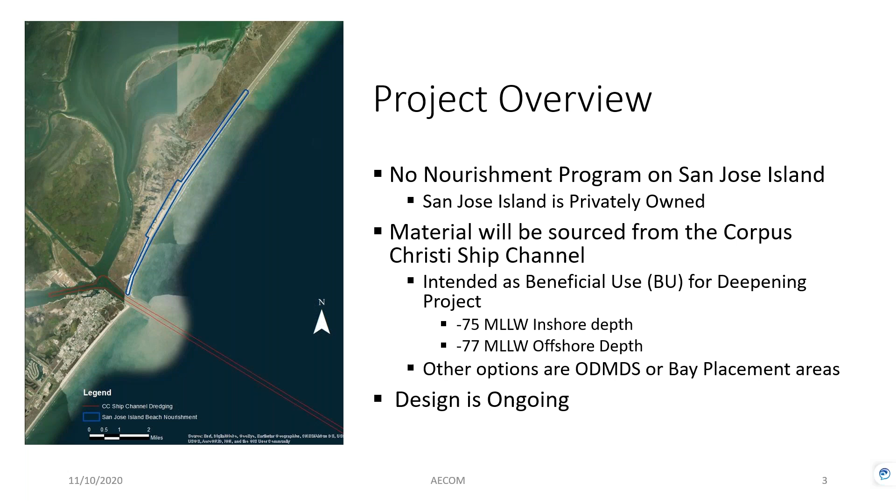And as you can see on the picture on the left, the extent of where the intended nourishment is.

Now a brief history of the site. As you can see on the leftmost picture, taken in April 2017, pre-Hurricane Harvey, there are no major washouts on the beach, and it's pretty consistent beach all the way along the site. Then a picture was taken immediately post-Harvey.

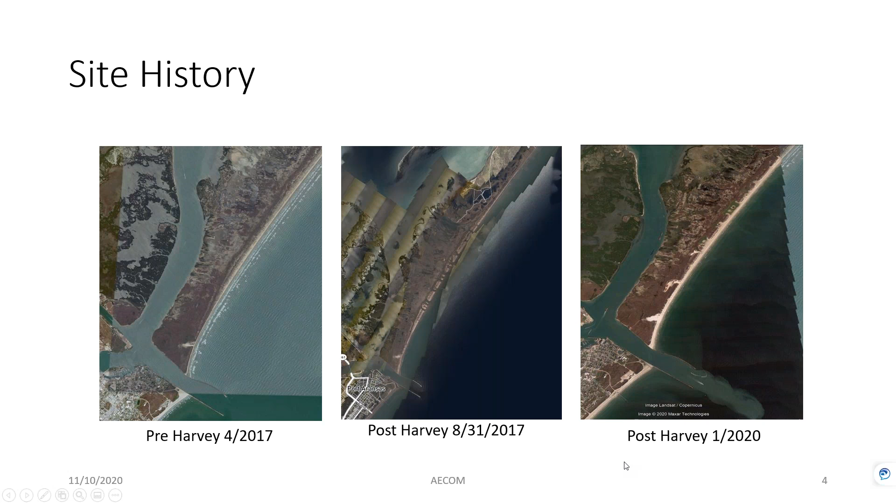From this picture, there is major washout and breaches throughout a large portion of what is shown. Then, post-Harvey, a more recent photo shows some natural recovery, but there is still major washout that needs to be repaired due to the damage by Harvey.

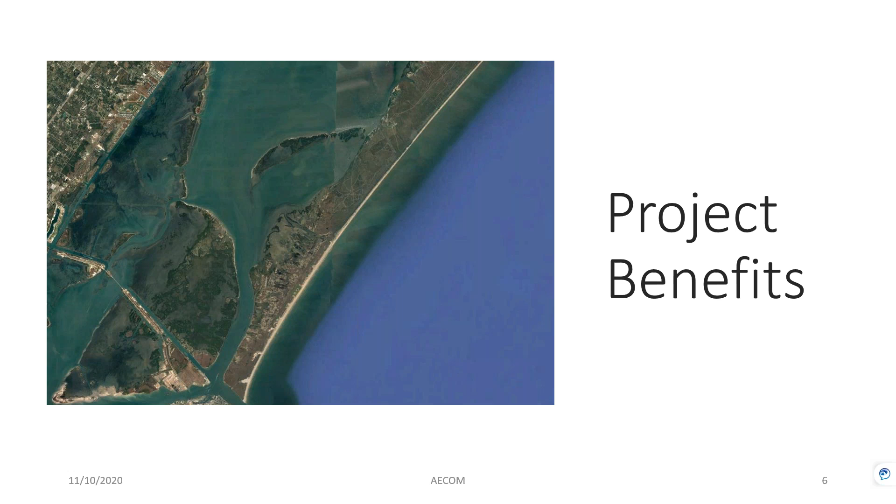Additionally, there are some other benefits. San Jose Island, while undeveloped, provides protection for the critical habitat located directly behind the beach, as well as providing the first line of protection for some submerged aquatic vegetation and other critical habitat in Redfish Bay behind the island. So that island will give some more protection there.

Now we will move on to survey work that has been performed. Starting with the geotechnical survey work, there have been 22 boreholes representing approximately 16.6 million cubic yards of material. For each of these boreholes, we looked at a grain size distribution as well as a soil classification at multiple different depths. This was done to determine whether or not the material was suitable for the beach.

In order for it to be viewed as material that could potentially be placed on the beach, it had to be classified as sand, have a similar grain size distribution to the selected site, and have no contaminants or shell hash. Of that 16.6 million, we found that approximately 5.5 million cubic yards of material met this criteria and could be placed on the beach.

Below, in the table, you see a comparison of the mean grain sizes of the proposed placement material versus the native material on San Jose Island. As you can see, they are slightly larger on average. This is okay because if it's a bit larger, you get more cohesion between the borrowed material and the existing material, which is beneficial to your beach nourishment project.

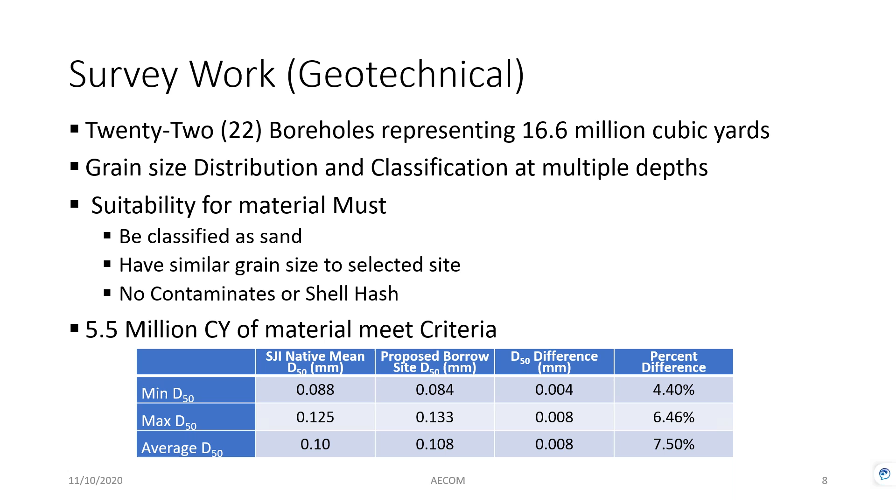Although the mean grain size was not the only thing we looked at when determining whether or not the grain sizes would work, we actually looked at the entire grain size distribution. This slide shows a sample of what was done for each borehole. As you can see, the red line was taken at a depth of 11.5 feet, and that sample was classified as sand and falls relatively well within the existing grain size envelope. So that section of material would qualify as being able to be placed on the beach.

The second line, the green line, while it does line up within the envelope for the existing material, is classified as silty, more like clay, so it does not meet the grain size distribution, and we would not want it on the beach. The farthest one is the yellow line; while it is classified as sand, that sample actually had some shell hash in it, which pushed it outside of the grain size distribution. So that is not something we would be looking to place directly on the beach.

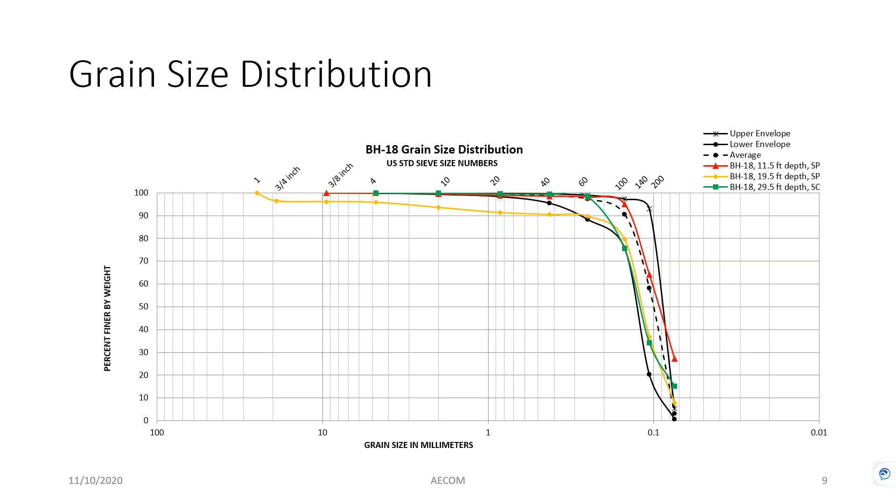And then the bathymetric survey work: there were 6 surveys done by 4 different agencies over the course of 18 years. The most recent was done by Naismith in June of 2019. There were also 2009, 2016, and 2017 surveys done by the U.S. Army Corps of Engineers, as well as a 2006 survey by Aransas County and a 2001 survey by the U.S.

Geological Survey. Surveys were done to determine the design templates along the beach. The entirety of these surveys were just over 18 miles, with about 1 survey every 200 feet or so. We don't have all 6 surveys over that entire distance, but we have at least 1 survey from one of these agencies over that distance.

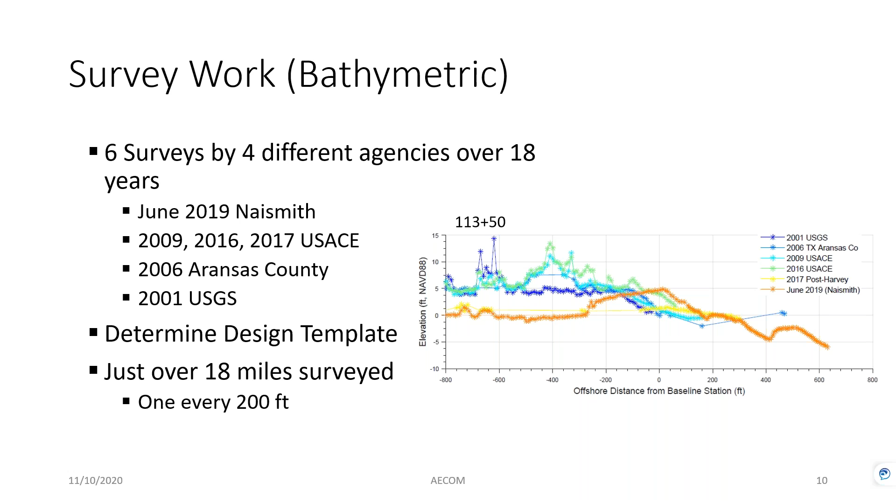As you can see from the survey on the right, the elevation of the beach drops shoreward after Hurricane Harvey, which implies that in this section there was a breach and some major erosion of the dune. That's something we'd look into when determining our design templates.

Now on to the preliminary design. We developed a few typical sections, and in each typical section you will see 2 profiles: a construction profile and a design or equilibrium profile. We have 3 typical sections.

We have one where there is a need for dune restoration, another where the beach was breached and needs to be restored—that breach, restore the dune, and then build out the beach seaward of that dune. And then there are sections with no dune.

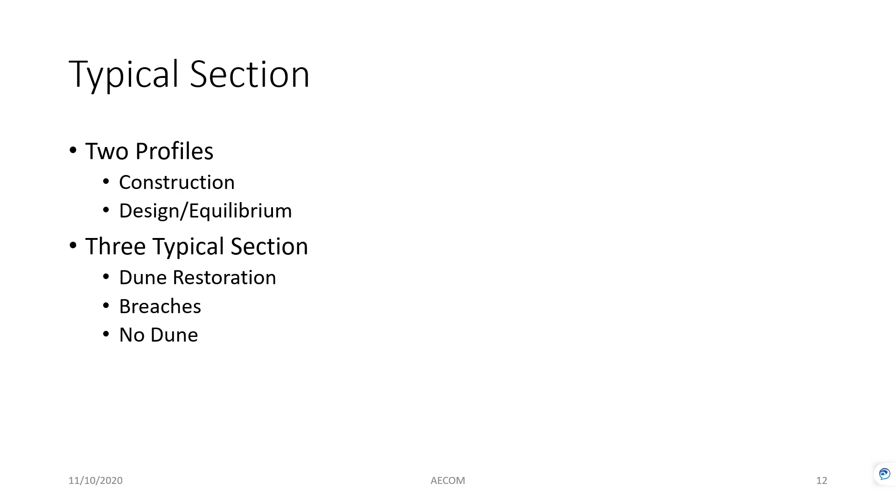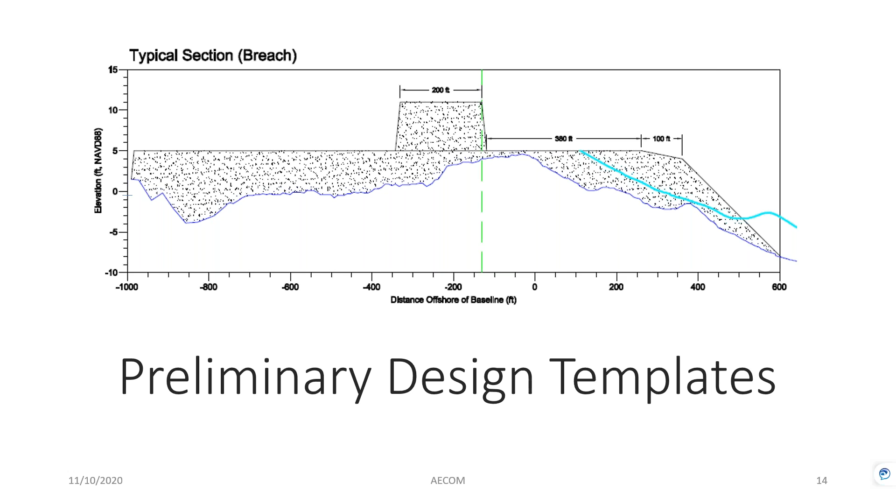Now on this one, there is no dune that needs to be restored. So this is the simplest one, and we are just restoring the beach out. This beach shown here is very similar to the beach sections shown for the previous two profiles.

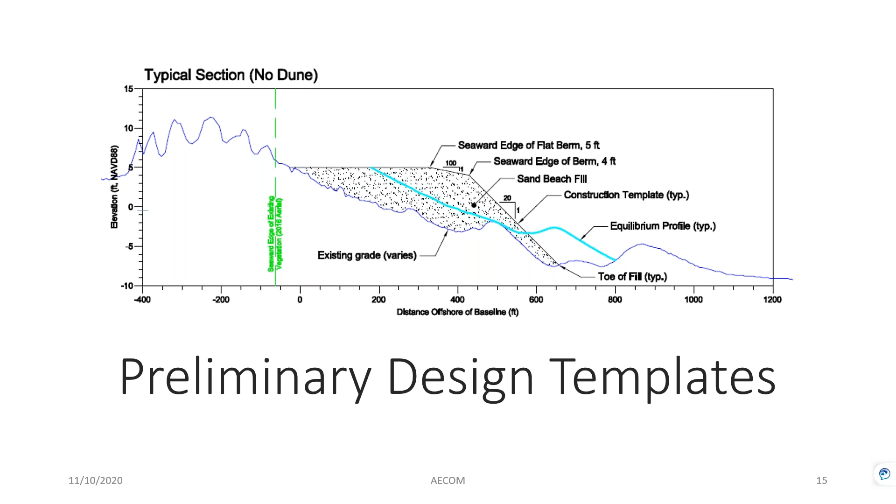Now, as we're going through and constructing these, there are a few things we need to consider that will potentially impact the effects of this project. We need to look at the quality of sand we are placing on the beach—the more similar the existing sand and placement sand are to each other, the better it will be. Also potential disruptions of seasonal recruitment for any benthic populations or microorganisms living in that section of the beach.

The size of the project—looking at how large our project footprint is and how much of the beach we are impacting—as well as our placement techniques, depending on whether we are placing it from the land side or the sea side, and placing it over water versus placing it over land.

We expect to take about 12 to 18 months for the system to reach that equilibrium profile that was shown.

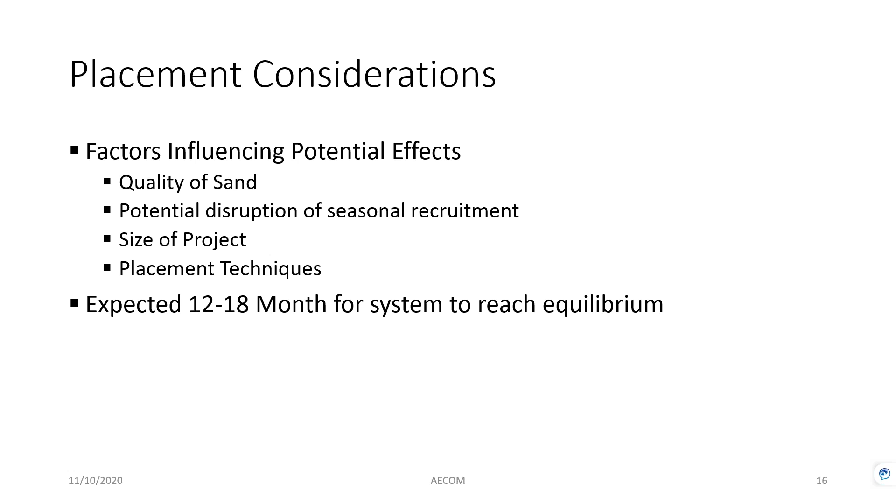The next steps involve an ongoing permitting effort, coordinating with stakeholders including the landowner to get permission to place material there, some wetland delineations that need to be done, as well as finalizing the design of the project.

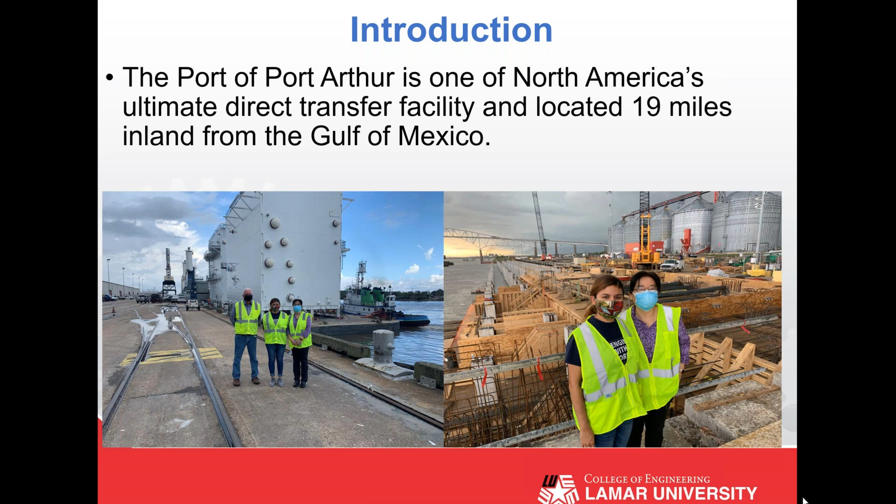Next picture, please, Jennifer. This is in the middle of their dock. You can see on the right side here, the bank on the eastern side has some erosion, with small trees or bushes covering it. They have slow erosion on this side caused by the wake wash. So they need dredging every 6 months. Go ahead, Jennifer.

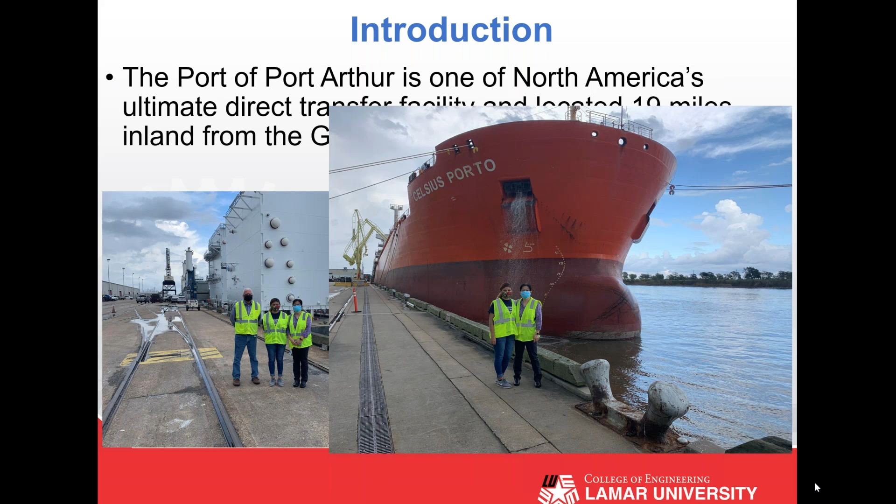We look at the problem around the site. We think the sediment load is caused either from the bank erosion due to the wake wash, or possibly from the channel due to flow condition change. So the objective for this study: we wanted to investigate the sediment load and better understand the sediment transport mechanics. So we start with the analysis using GIS data for the cross-section change.

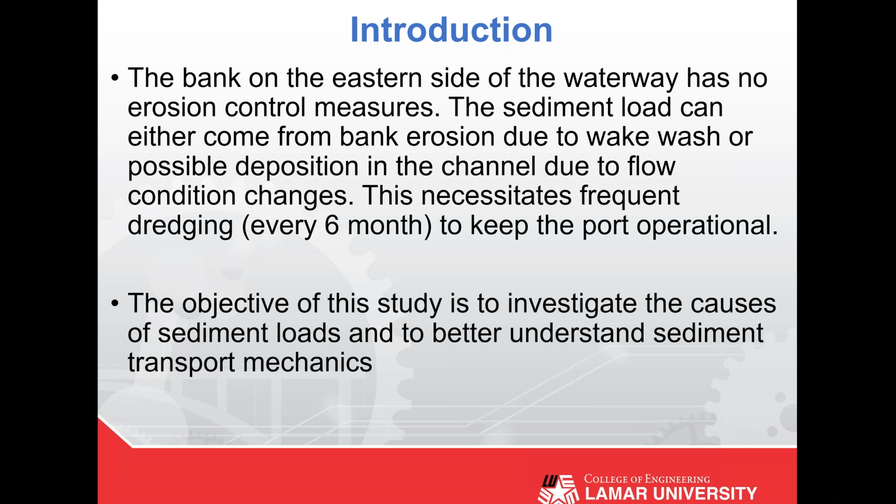Go to the next page, please, Jennifer. So we calculate the cross-section area at different times, using GIS data to try to calculate the flow area reduction over time. Then we also look at the flow data to try to figure out the flow condition in the waterway, at the station but also from the NOAA website. Then we combine the volume change and area reduction change with this flow condition to see what the main cause is in the flow condition for the sediment load in this part of the waterway.

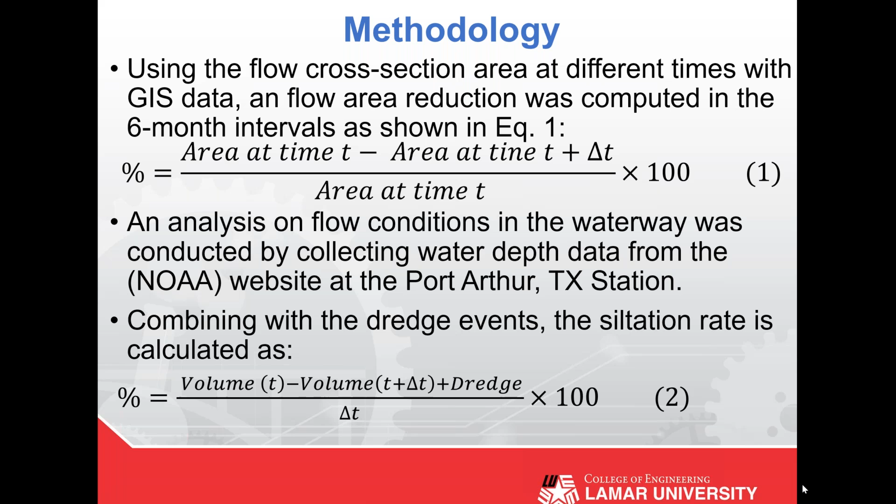We also combine their dredging events, trying to calculate the siltation rates along with time, to see what is the main effect on the sediment transport in this part of the waterway. Now I'm going to turn it over to Jennifer for the results.

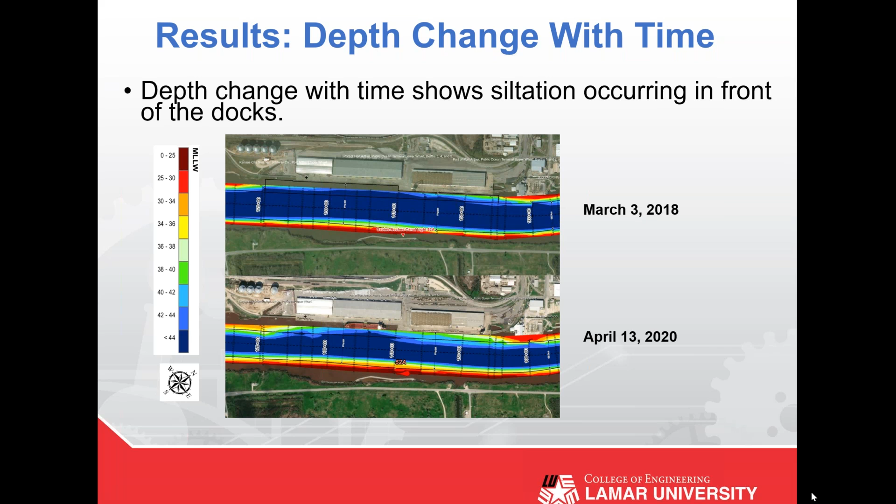To see the elevation change over the years, we used ArcGIS to convert the contour line shape files into raster files. There are 4 stations in front of the docks. However, we selected these 2 locations, Station 150 and Station 130, since they showed the most dynamic cross-sectional change over time. An animation will be demonstrated for these locations.

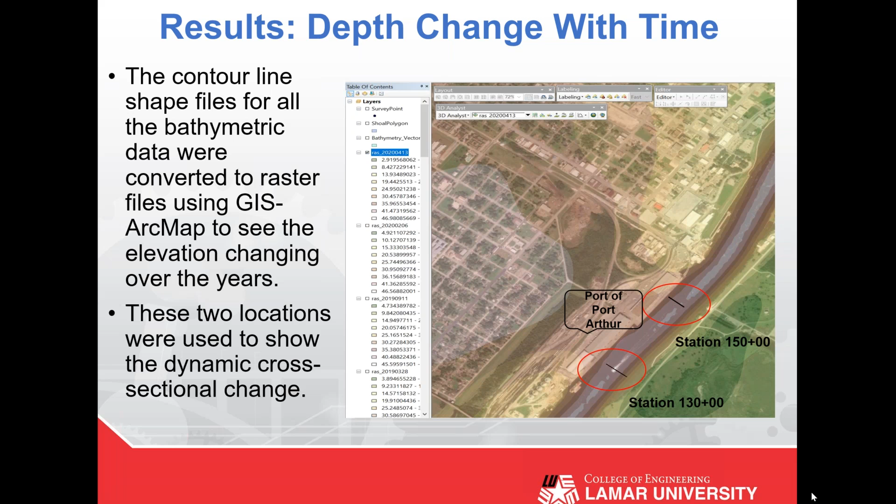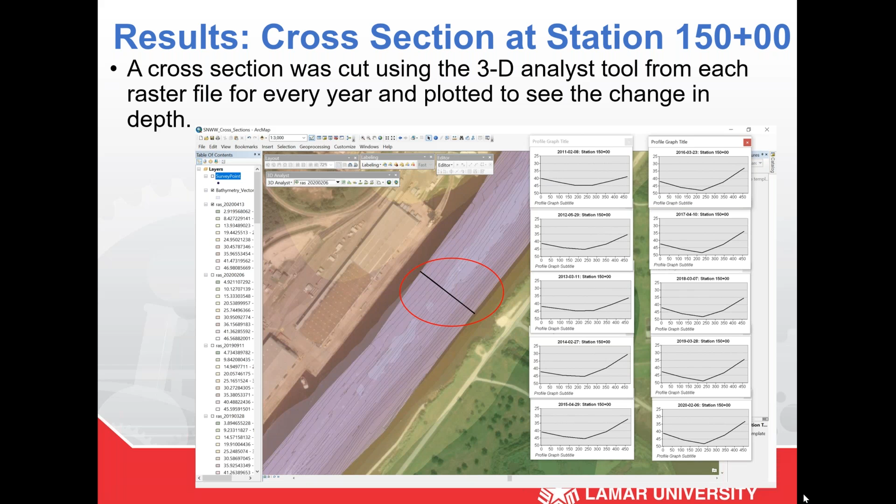Using the raster files, we were able to cut our own cross-section using the 3D Analyst tool. One was cut for each 6-month time period and graphed. Below are the cross-sections for Station 150. Here is an animation of the cross-sections at Station 150 showing how they are changing over time.

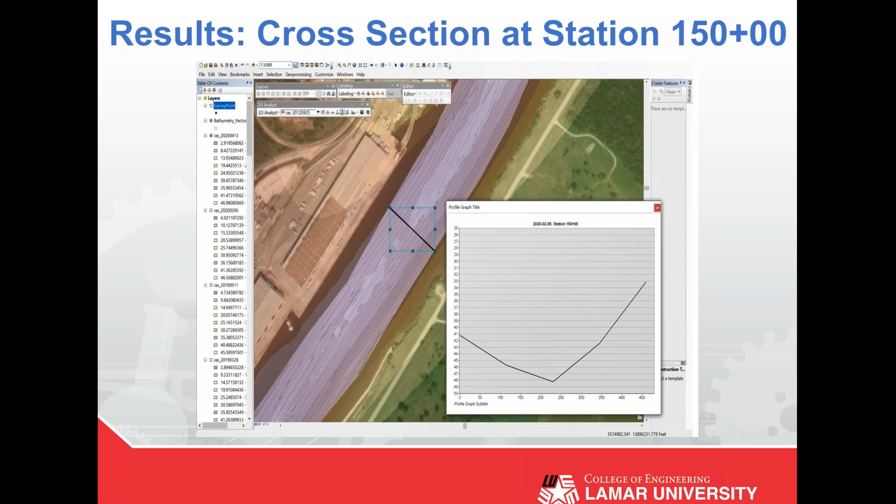And here are the cross-sections for Station 130, along with the animation.

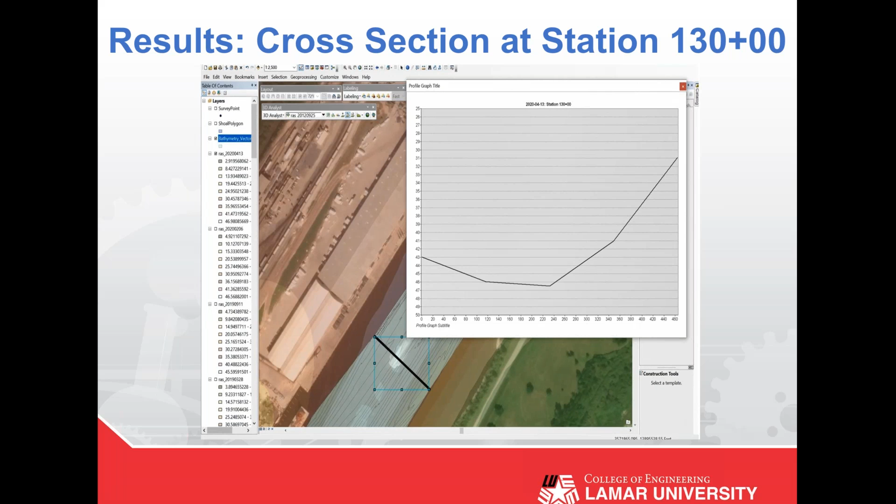Once a cross-section was cut at all the stations in front of the docks, the data was collected and inputted into an Excel spreadsheet. We were able to calculate the area at each station and calculate a percent reduction. Each data is listed for the recorded dates along with a graph of the cross-section. The percent reduction shows how much siltation or dredging occurred between the time intervals, so you can see how the area is increasing or decreasing on the graphs.

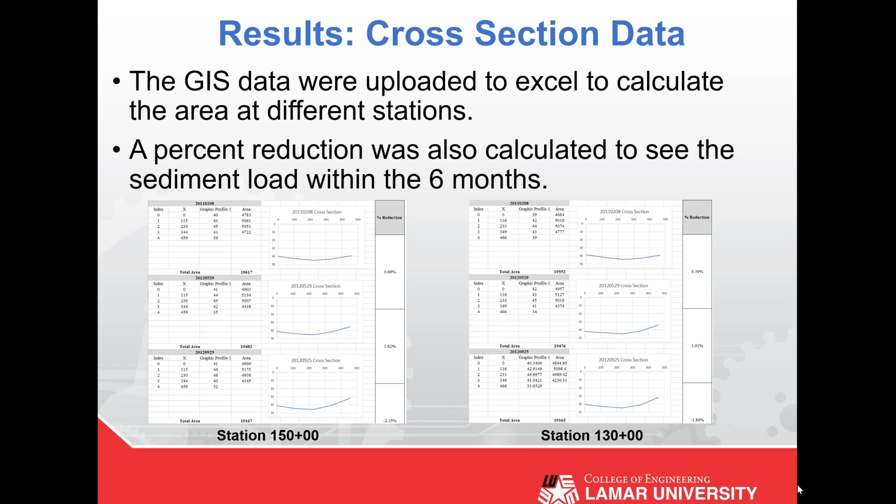The reduction rates are graphed below for all stations. A positive value signifies siltation occurring, while a negative value signifies dredging occurring. Dredging dates were provided and are displayed as the vertical black lines. You can notice when the dredging events happened.

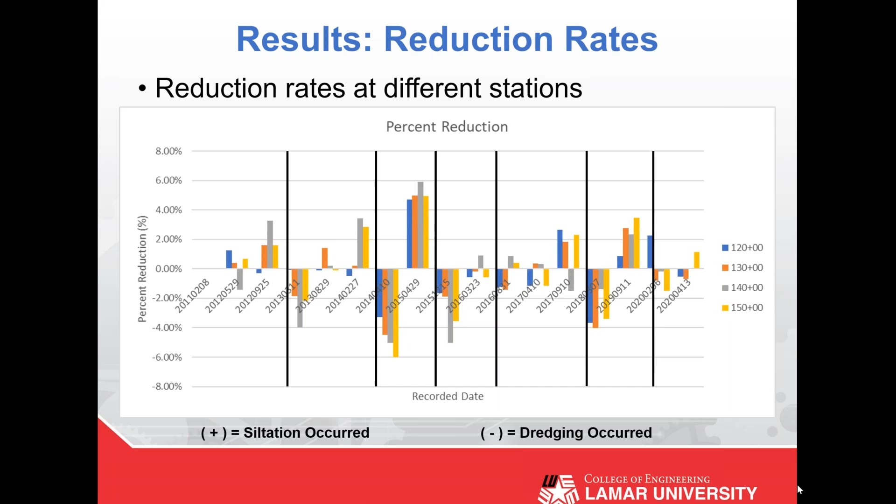After calculating the flow area at each station, a total volume was found and graphed to see the flow volume change with time. The flow volume change was calculated between stations by using the average area times the distance between the stations. The water depth data collected from the NOAA website was used to identify flow conditions.

A drought causes high sedimentation load because of the capacity of the water having a small flow rate, causing a decrease in the sediment movement. With flood events such as Hurricane Harvey and Imelda having a high flow rate, these also caused a high sedimentation load.

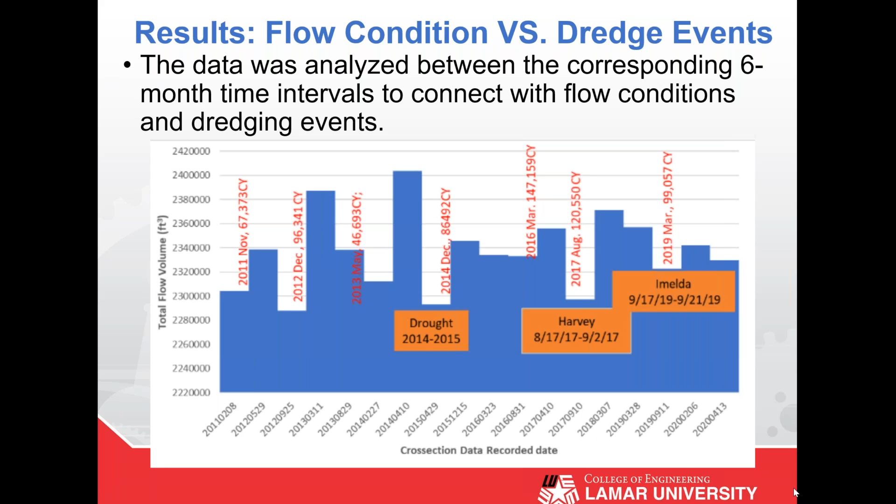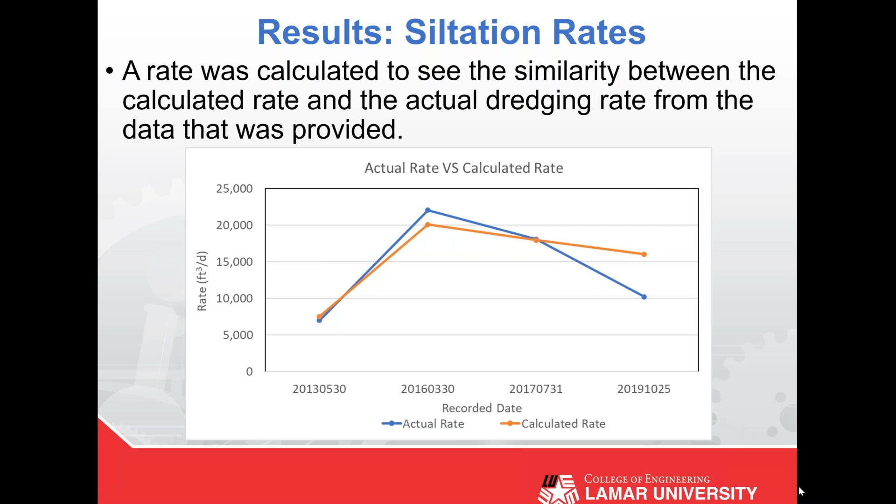The first 3 dates seemed to be fairly close, but the last date was not. We might need to add more cross sections in between to calculate a better flow volume to get a better rate estimation.

Now I want to present the wake wash effect. We had a previous study about half a mile downstream of the port of Port Arthur. Over that side, we have a bank which has all the soil open, so we were able to take soil samples around that part of the waterway. We also installed an instrument which can measure the wave height caused by vessels.

So we had the wake wash data and the soil data, and we did the BSTEM model for that part of the waterway. We found that if there are no protective measures installed, the bank is going to be very easy to erode. Then applying the soil data, wave data, and flow data, we developed a BSTEM model.

If we have large woody debris installed on the bank or on the toe, it can help prevent erosion from the wake wash. Compared to the field situation, in this part of the waterway there are small trees around those banks, which is why the erosion caused by the wake wash is not dominant on this side.

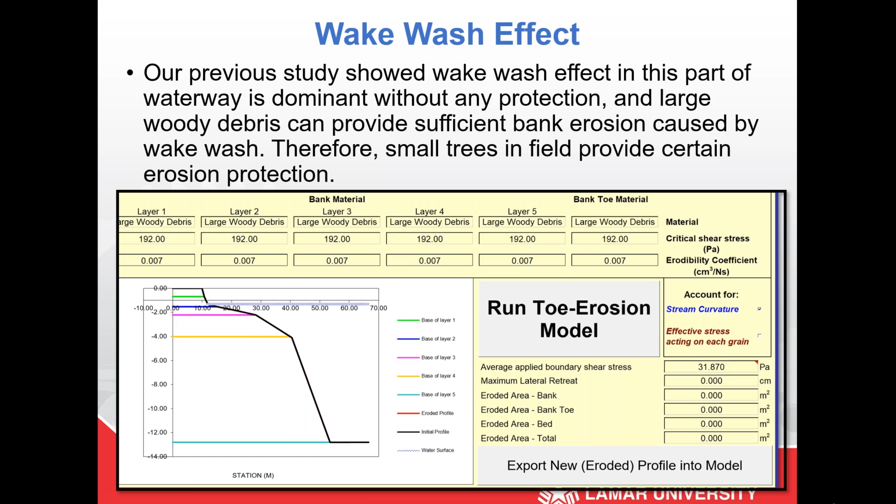So our conclusion from all the investigation is that the main cause of erosion for the sediment in this part of the waterway is mainly because of flow condition changes. Either high flow rate or low flow rate can cause the sediment deposition in this part of the waterway.

So for the ongoing study, we try first to get the bathymetric data, which can cover the whole river, including the channel and both sides of the channel, from the eastern bank to the western bank.

We already have all the sediment grain size distribution analysis for this part of the waterway, and we are collecting data for flow rate and sediment load for model development. We plan to develop a HEC-RAS model first, since that's a 1D model, to simulate high flow rate conditions and demonstrate flood conditions.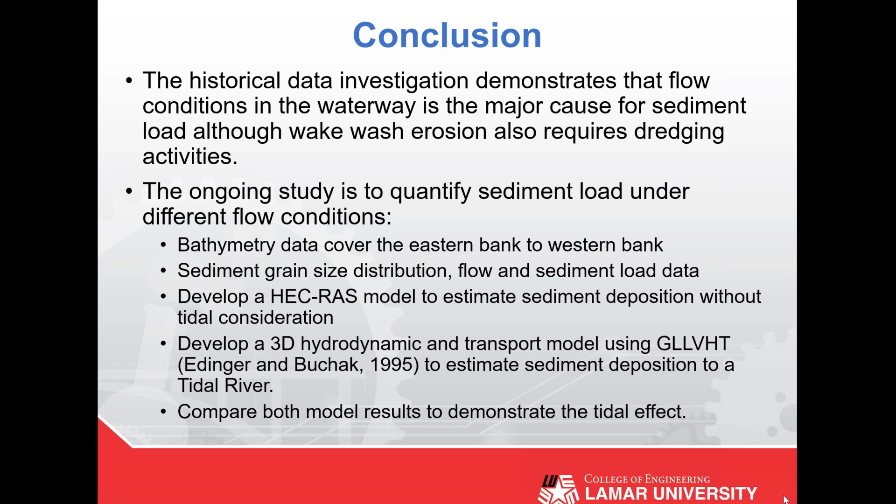Then for the small flow rate, or the more lateral change in sediment load, we plan to develop a 3D hydrodynamic and transport model, using the lateral and vertical numerical model to estimate sediment load, which considers the tide in the river. So then we can compare those two models to figure out how the flow rate can change sediment loading in this part of the waterway. That's all, thank you for your attention.